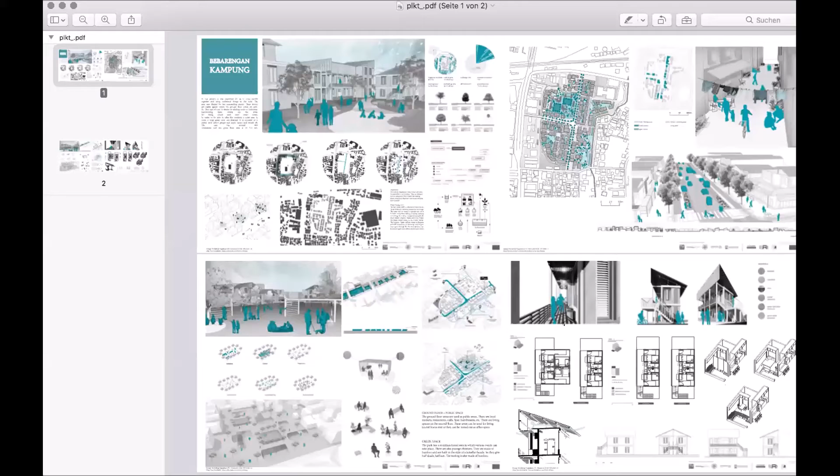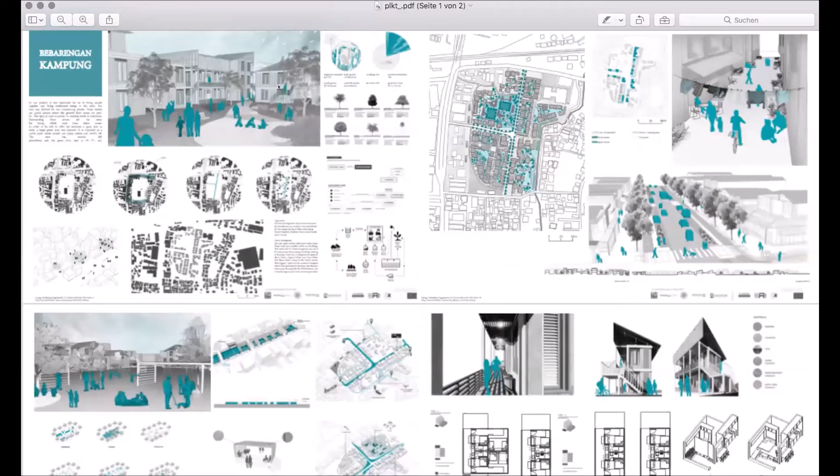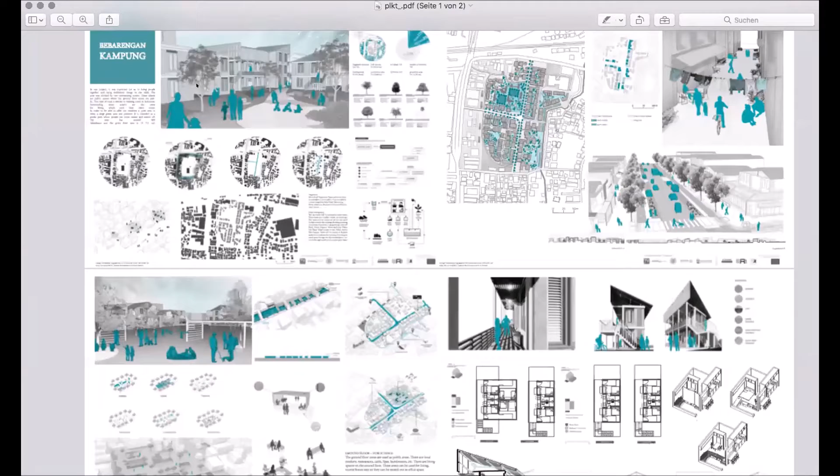Yes, the logos are very small. You have 4 plots in one, that's good. Okay, now I got it, thank you, that's an overview. Yeah, that's the overview, because we thought it's also a good view to see who stands together. Yeah, definitely. So I'll zoom in just a bit.

So this is our project, Bebarengan. I'm not sure if I pronounce it right.

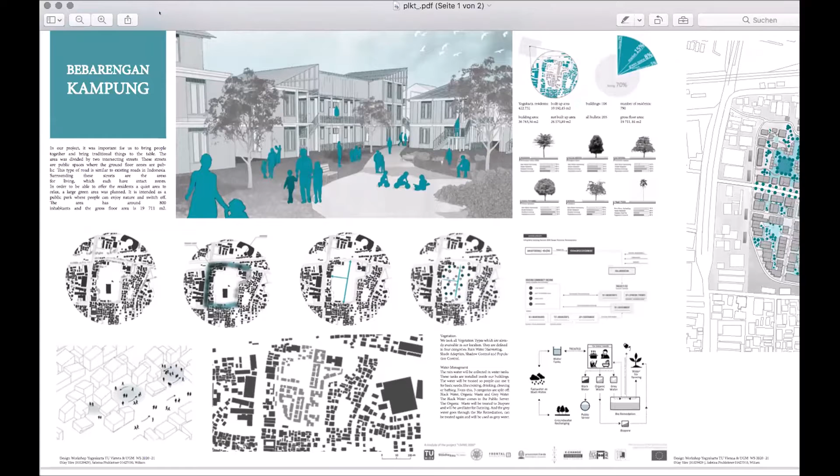If not, please just correct me. You have to ask William. That's true, but he never said it was wrong, so I think it's okay. It's Bebarengan. Oh, thanks, yeah.

So for this project, for us it was really important to make something natural, so passing to the Kampung area, because we started in a very wrong way. I think it was not so much like a Kampung project, and we started to research lots more and understand the people.

How they live and what they need. So we looked at the existing vegetation areas in the Kampung and around our site, and we looked at where it's loud on our site, or where has a lower noise intensity, and how can we build our roads so people can arrive easily to our site and use the roads in the best ways, and how people are going to move on our site, what they actually need to move.

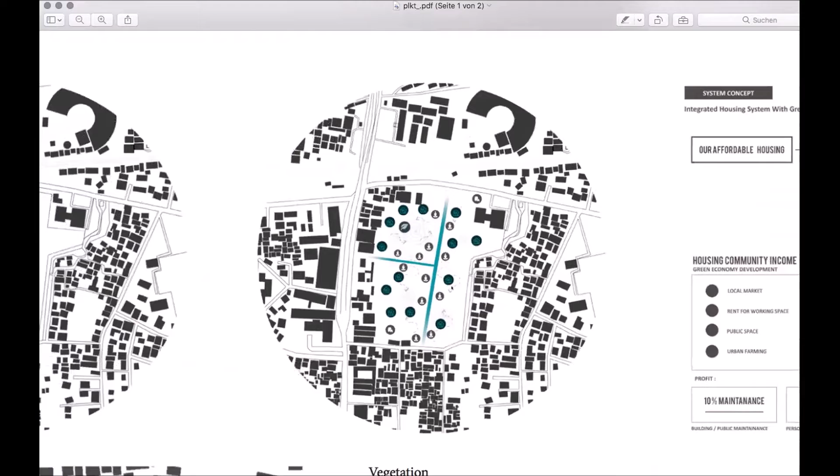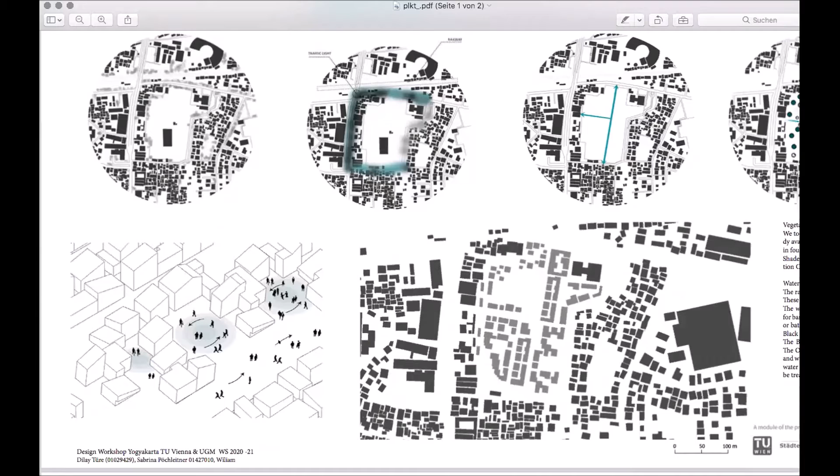So we realized people like to get together very much in Indonesia, in Yogyakarta, or in this Kampung area. So after we decided on our road, we started to build our buildings around the roads, and tried to make as many meeting areas as possible for the people.

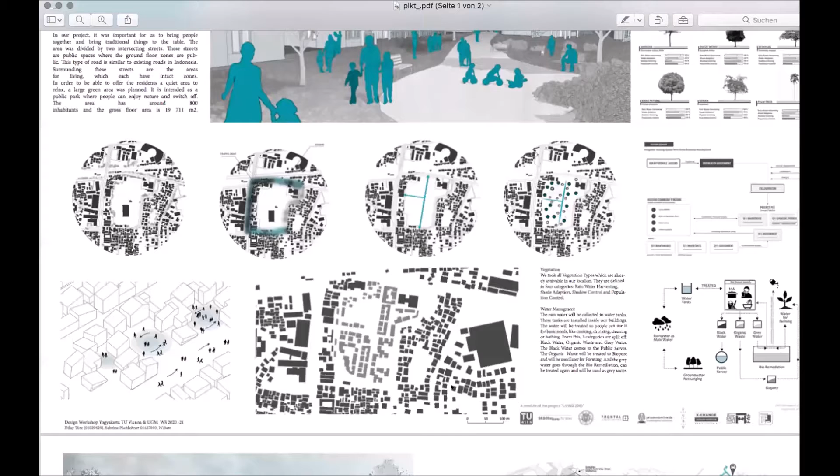And if we see our ground figure plan at the moment, we see the harmony with the site, which is new, with the rest of the Kampung area. And this is how it actually looks.

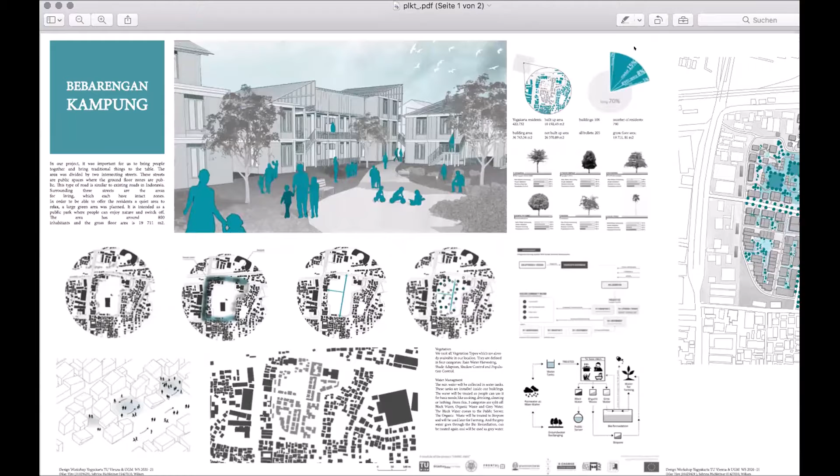And Sabrina is going to add something. So now a little bit about our statistics. We have around 800 residents in our city and around 20,000 square meters gross floor area.

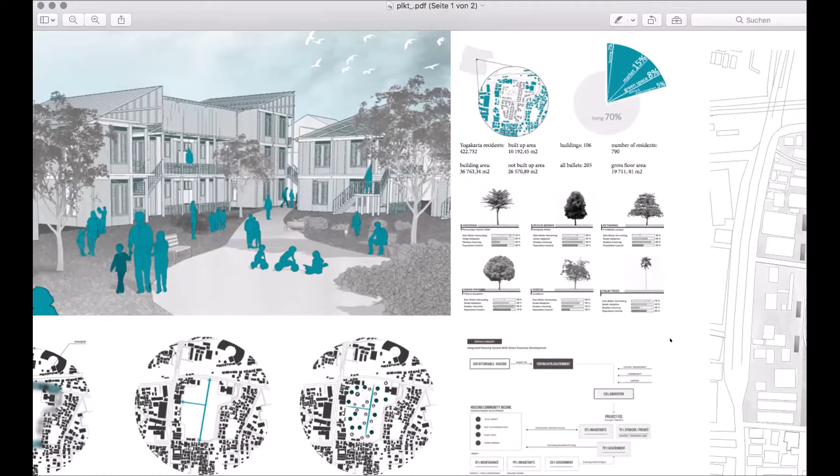Our whole area is like 70% living for the people, 2% from farming, then 15% by the market [shares of total]. Then we have a green space, like a park, where people can relax and calm down, because outside there's a lot of traffic and often it's very loud in this area. And also we have 5% for waste management and for parking, because this is also very important.

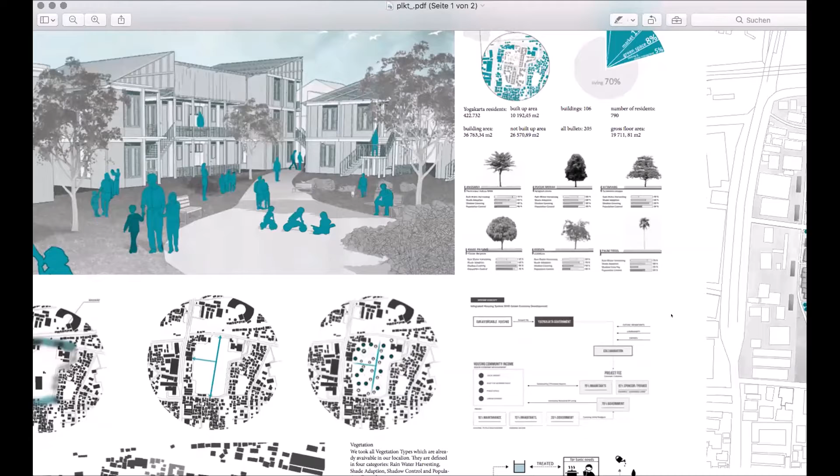So for our green space concept, we took all vegetation types which are already available in our location, so it fits more with the surrounding. And we tried to define them with 4 categories: the first is rainwater harvesting, the second shade adaptation, then shadow control and population control.

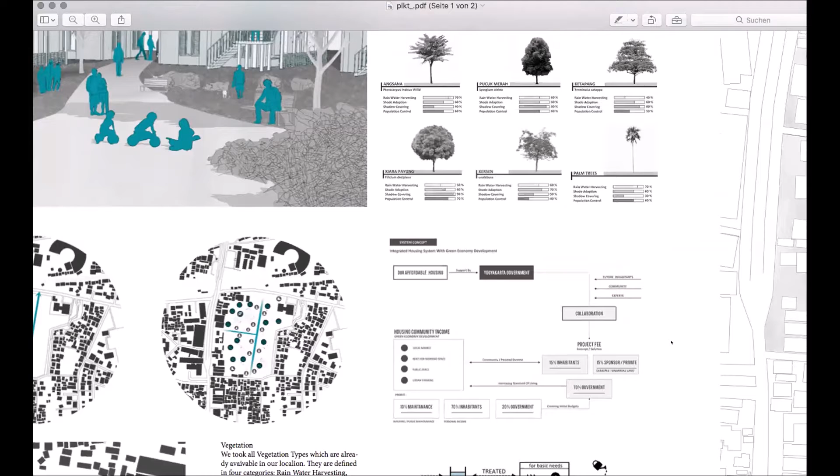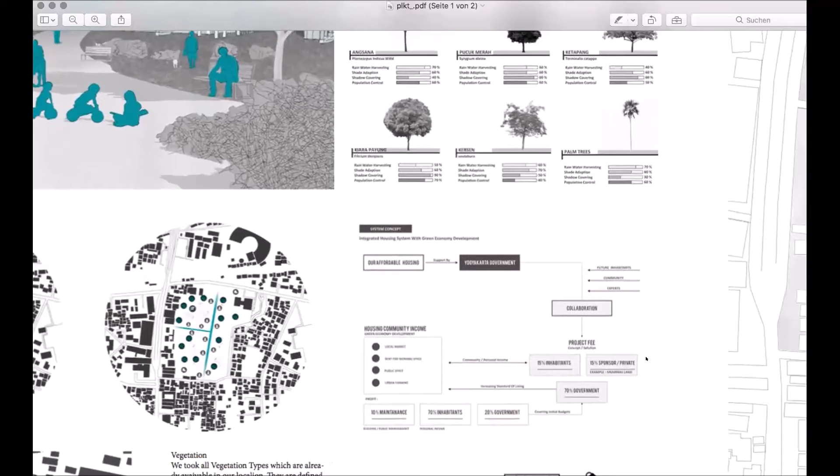Then we also thought about how we can make affordable housing for the people, and we had a few thoughts on it. Firstly, we need support from the Yogyakarta government, and this leads to collaboration. So 15% is from the people who live there, from their income, 15% is by private sponsors, and 70% by the government.

So we thought about how the housing community can make an income. First, we thought about local markets in the area where people who come to our area can buy something, but it's also for the people who live there. Secondly, we thought that people could rent space for working or business, so people who work there will also come into our area. And then public space, meaning restaurants, cafes, spas, barbers, anything like that, and urban farming.

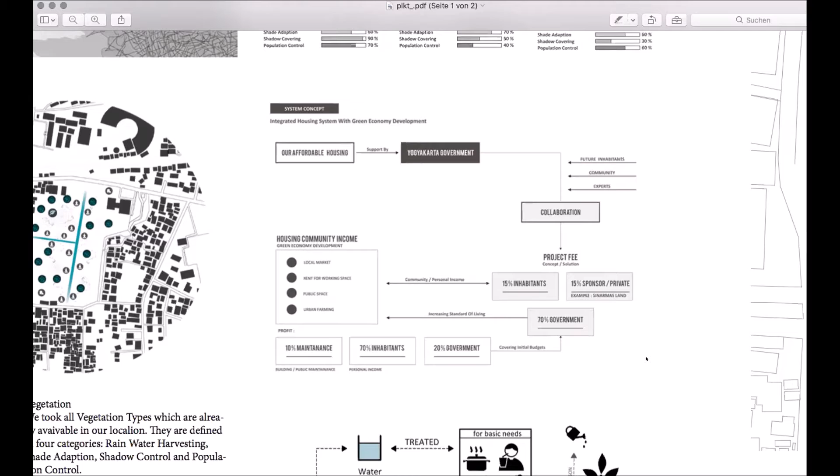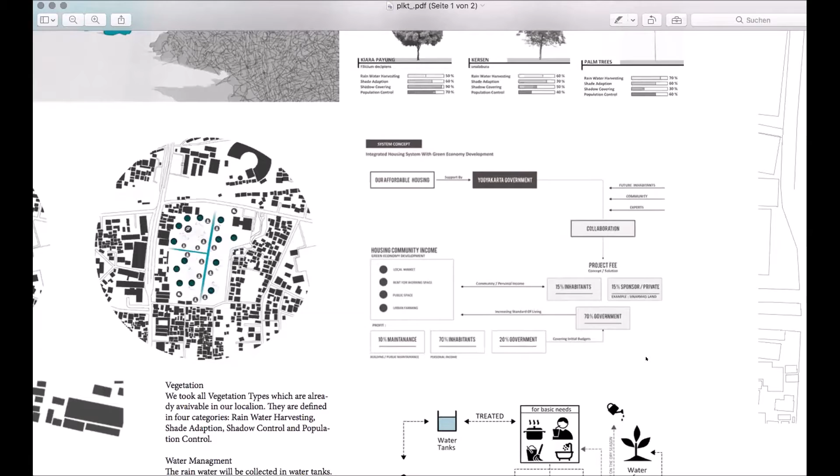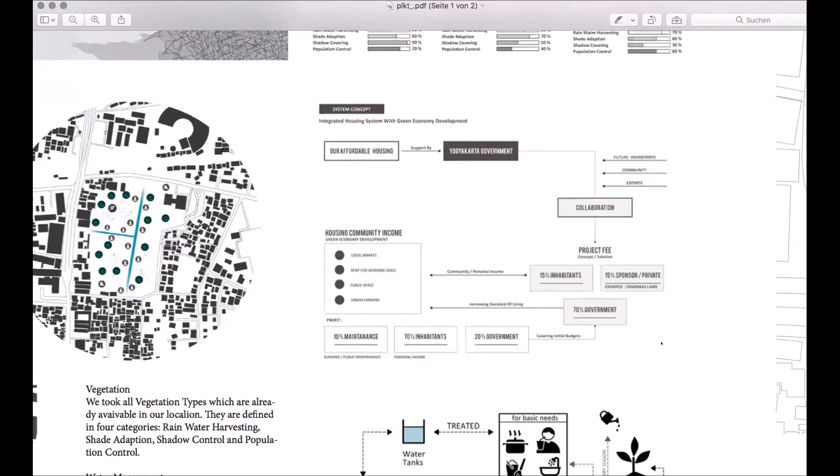So we also thought, what if there is a pandemic like right now, what do we do? If there is a case like that, we think we switch things, meaning we focus only on our local markets and not so much on tourism, because there won't be as much tourism and not many students will come and live in our place. And yes, so now I will go to our water concept.

We start by collecting rainwater in water tanks, and these water tanks are included in our buildings. This water will be treated, and it can be used for basic needs like cooking, drinking, cleaning, or bathing.

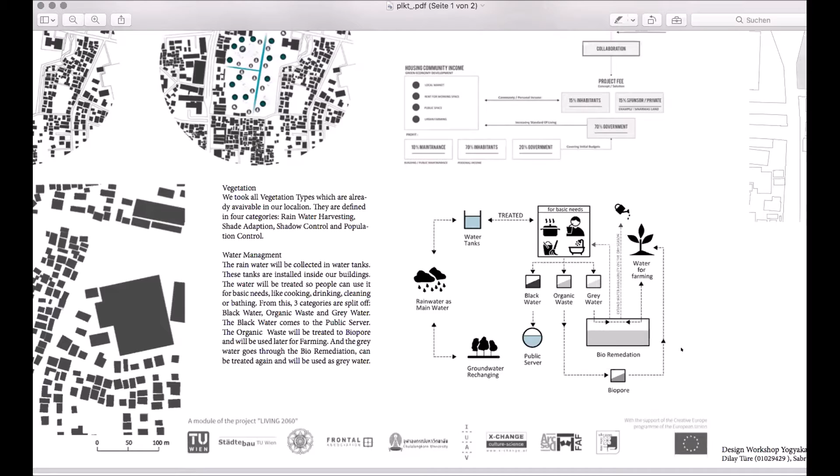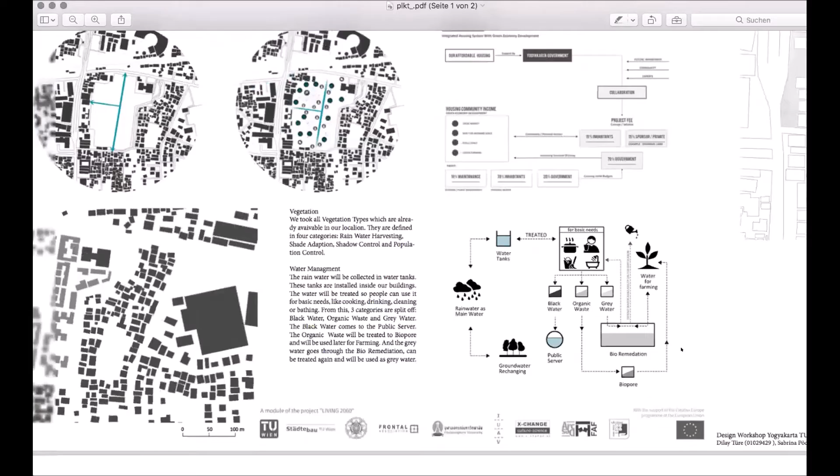From this, three categories split off: black water, organic waste, and gray water. The black water goes to the public sewer, the organic waste is treated in the biopore and used later for farming, and the gray water goes through bioremediation and is also used for farming. It can also be saved for dry seasons and used as gray water again.

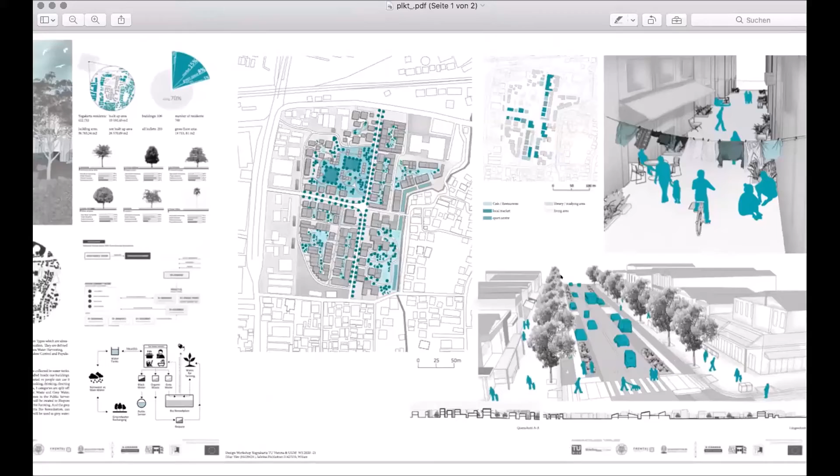Here we see the master plan and some views imagining our streets. How can they look like?

We imagined and offer a big park for people who really like to get together, take space, and make events all together. This park is there for that.

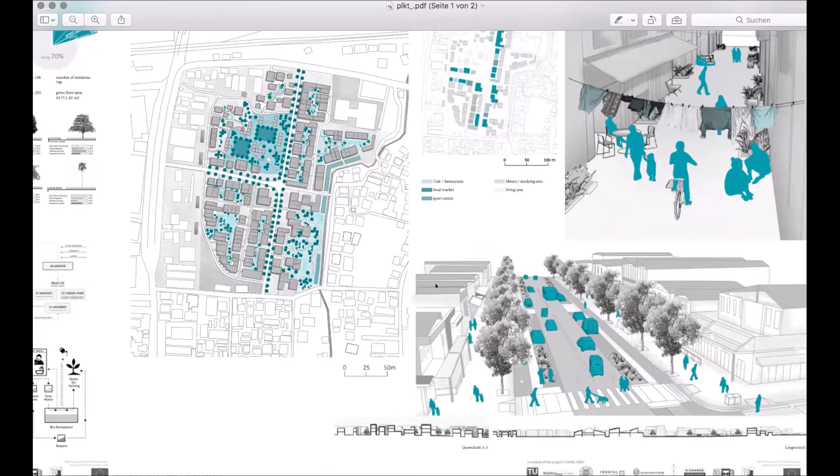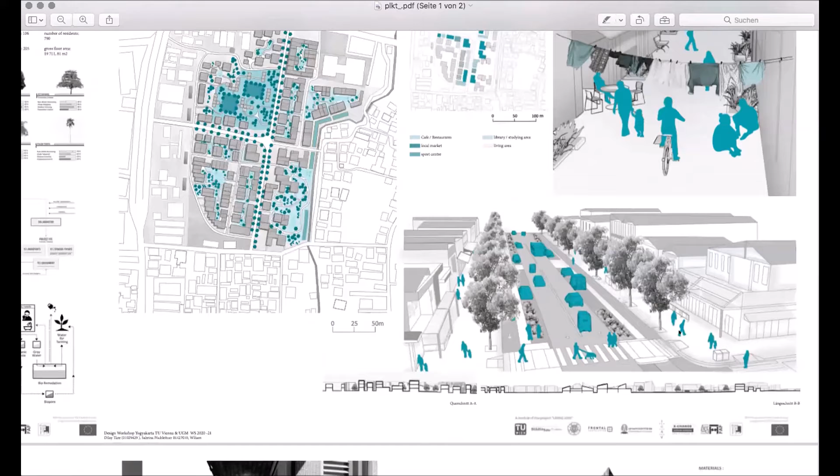This view represents the street, the main street. Our research shows that in Kampung areas, the ground zone is always a commercial zone, and upper floors are for living. So this street is a big street with some greens and trees, where people can buy stuff, with meeting areas representing this.

This picture is from somewhere here, for example, or here. It's a smaller street between the buildings. People can just sit there, because we saw all the time in this area a kind of living area outside. People can just sit, take their tables, and meet there.

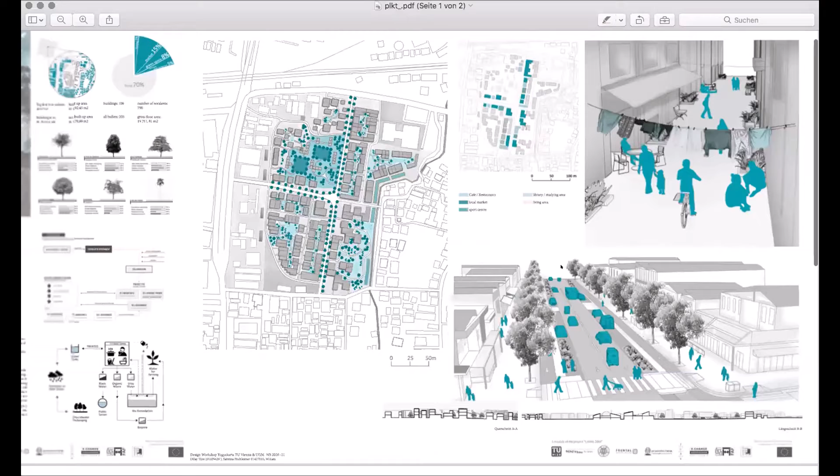Would you like to add something, Sabrina? No, actually, only on the graphic, you can see we pointed out where it should be. Oh yeah, exactly, just for a better explanation.

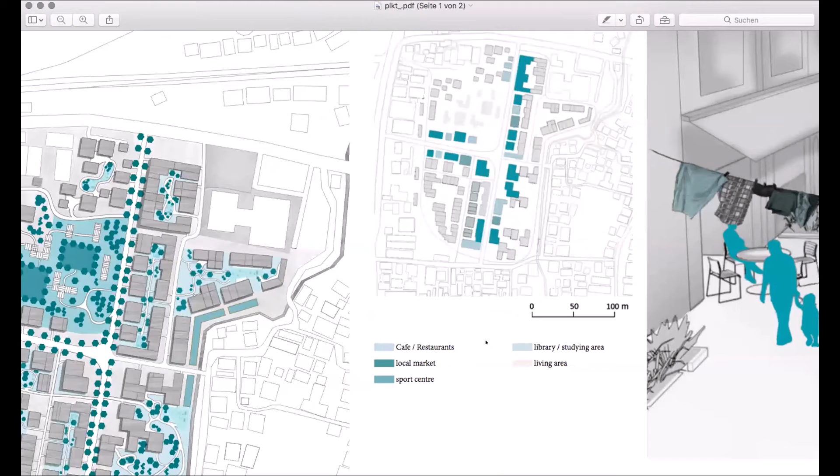So everything which is blue and middle blue, those are the ground floors, and these are public. Let's go to the next page.

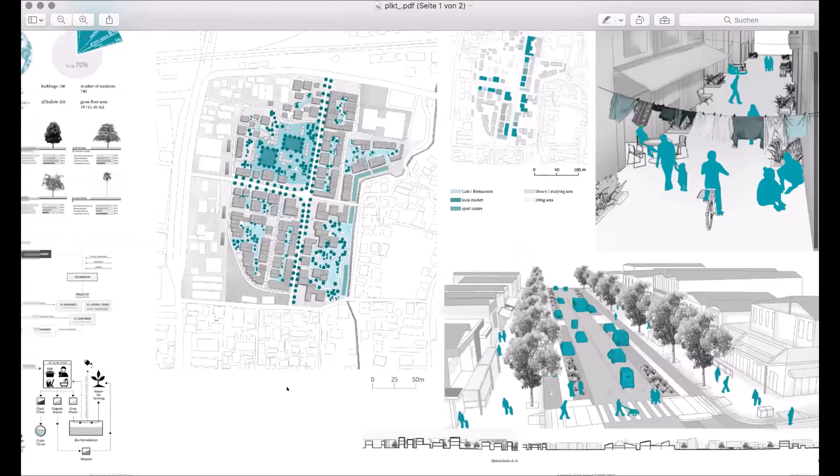And our park design. About the park design, because it's a big space, we made thoughts on how we can design it for people. We thought first that we want a multifunctional space where different events can take place.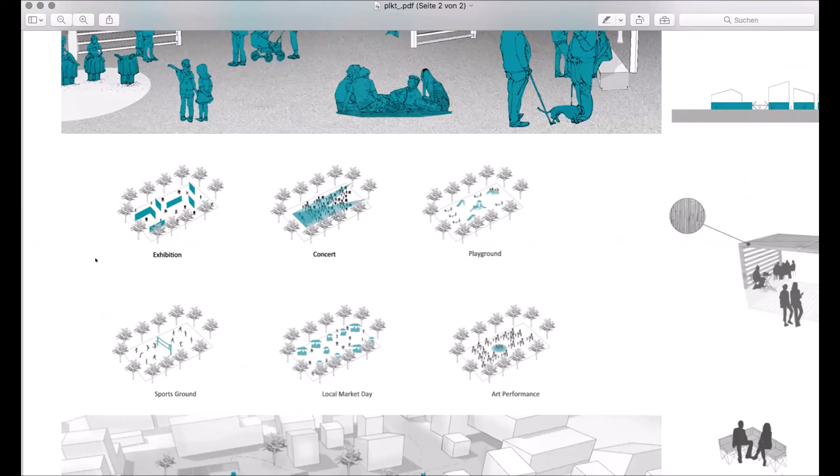Also, on a smaller scale, we thought that traditional parks in Indonesia have a gate as an entrance, and we thought we could make something similar but more abstract.

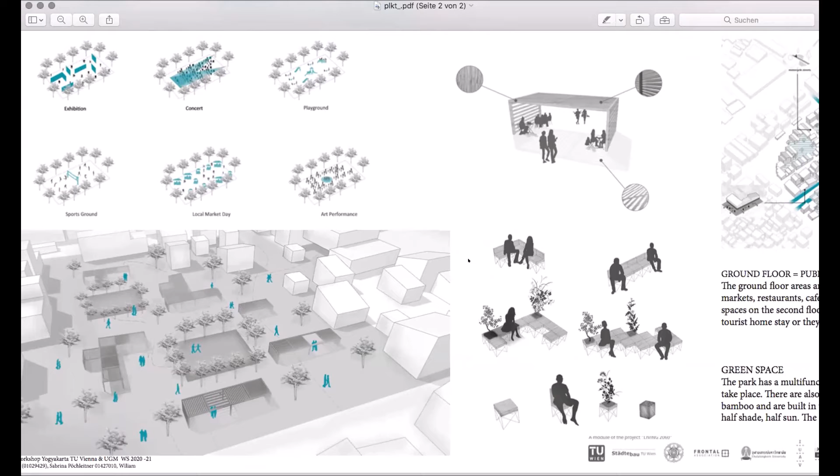So we made this passage where people can sit under it, chill, or just walk through it. The material is bamboo, and the facade is like a lamellen facade, so it's closed but also open, so it's not so hot in this area.

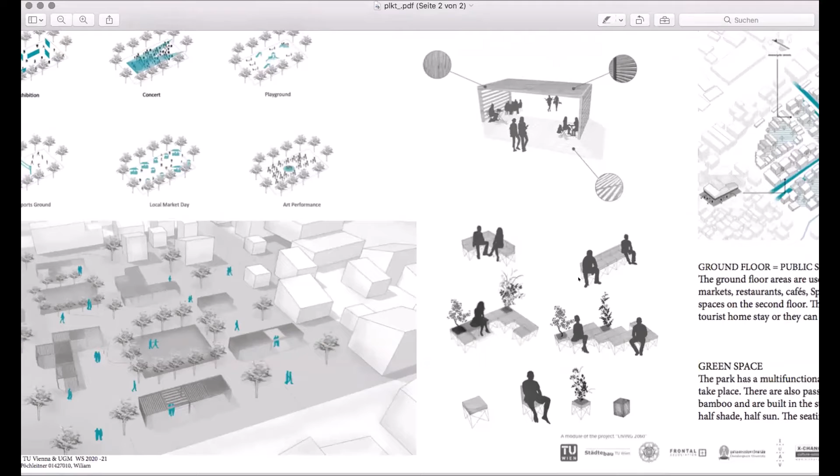Above and under it there are sitting options we thought about, how they can look like. And when you go up again, there's the same concept: on the ground floor there's the public space, and above there's a living area, but it can also be like a tourist homestay or something like this.

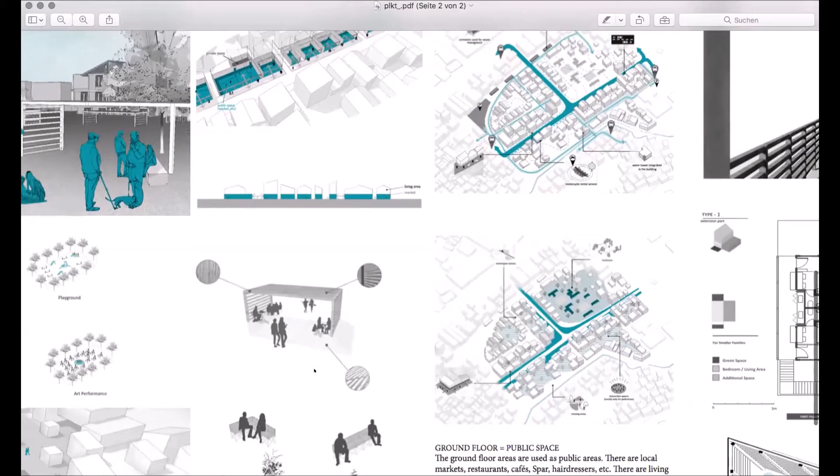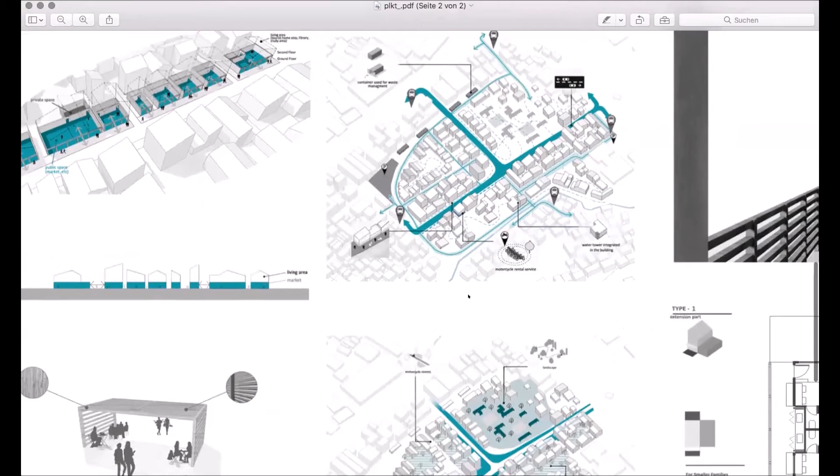This diagram shows the main street and streets for cars, pedestrians, and motorcycles, with some bus stations around the site. We just thought about it, but it's possible. Of course it's a question, but it seems like it's possible.

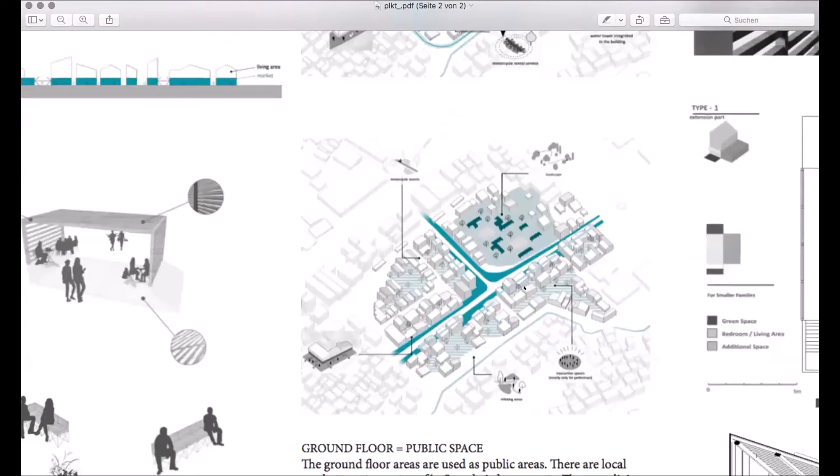And it shows meeting areas between the buildings. I think you're okay with the park explanation. One thing about it: the big line is only for cars, and the smaller line is for motorcycles, so we don't have so much traffic in our area.

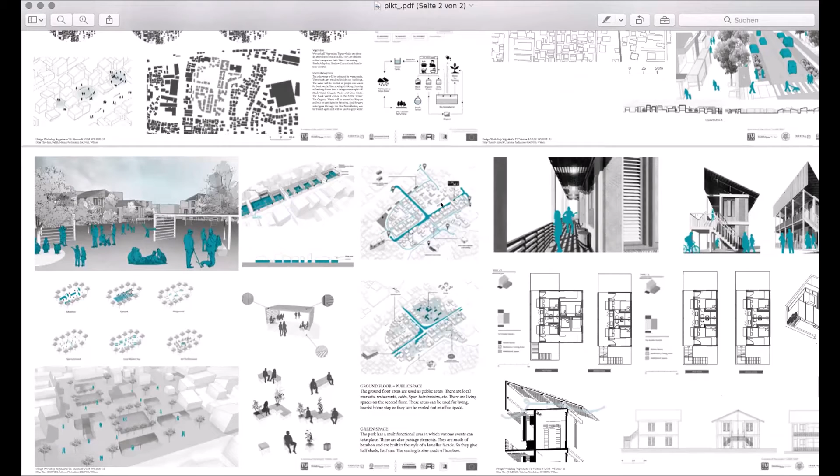So this is our building concept. We tried to design a building not so different from the Kampung itself, so we see open terraces, common kitchens that people use together, open entrances, and lots of space to use together.

If I just explain a bit the floor plans, this is the smallest version of our floor plans. Here we see two small flats, and they share the kitchen.

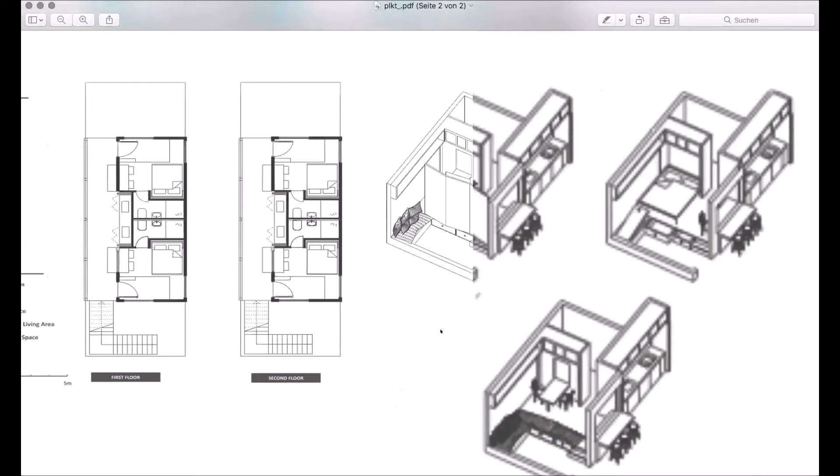If I show the 3D version, it's more understandable. This is the shared kitchen. It has foldable doors that can be folded and closed, and we have a big window connecting the outside and the inside.

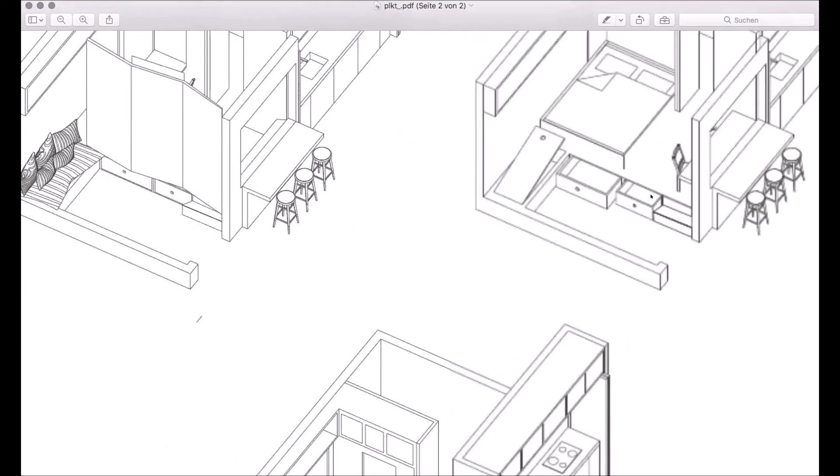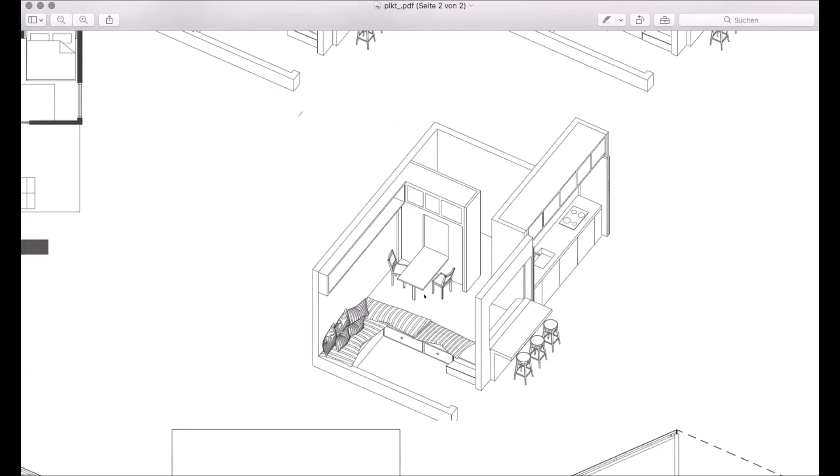So people can cook and bring the food inside, or pass and share the food with others. We offer lots of storage areas, about 40 centimeters high, with stairs so it's not hard to get up and down. Because the flat is very small, they can really use these storage places. This bed is foldable. When folded, they can use the space as a sitting area and enjoy an evening with this table, which is also foldable. So it's a small area, but has many functions.

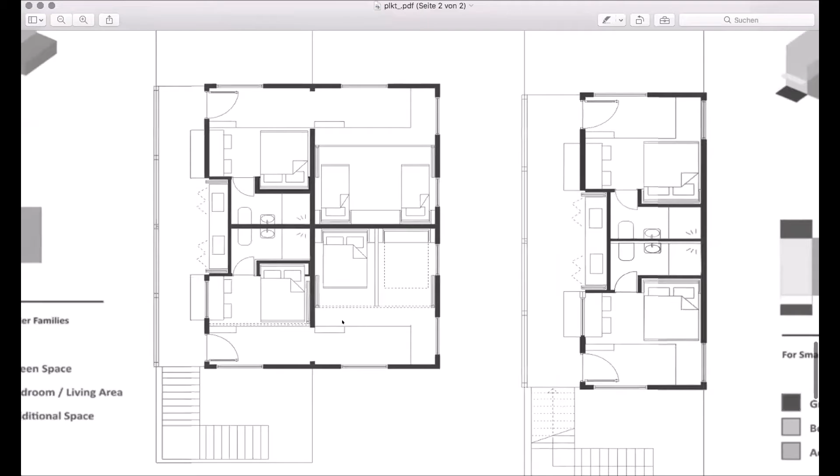It can also be bigger because our building system allows people to build extra external parts if they need. You see here the house type - this part is the essential part, like I showed, the smallest part. They can build this part as an extension, and they can have double rooms with double beds or small beds.

They're also foldable. This is a section of the building, so we see a roof system here. It's a very light roof, just for rain protection - it covers the rain but lets the air flow through. It's open and designed for tropical areas, a very usable roof, I would say.

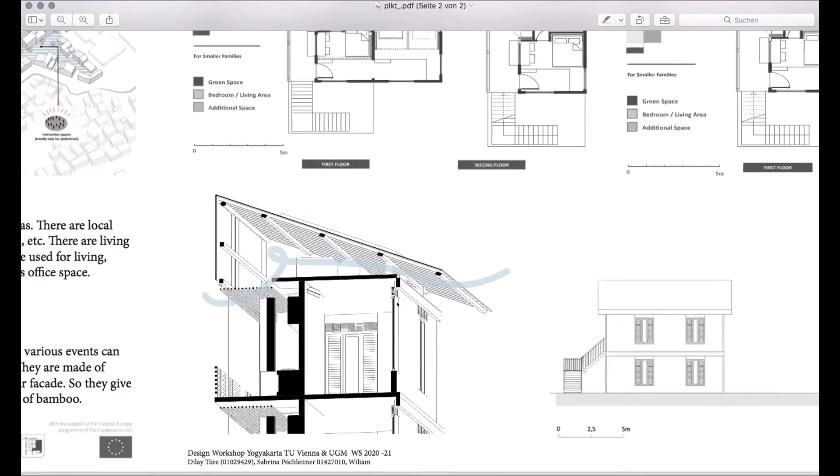We thought this angle of roof is very suitable for a solar system and solar panels. Also, under the roof there's enough space for storage, for batteries or a water tank, for example.

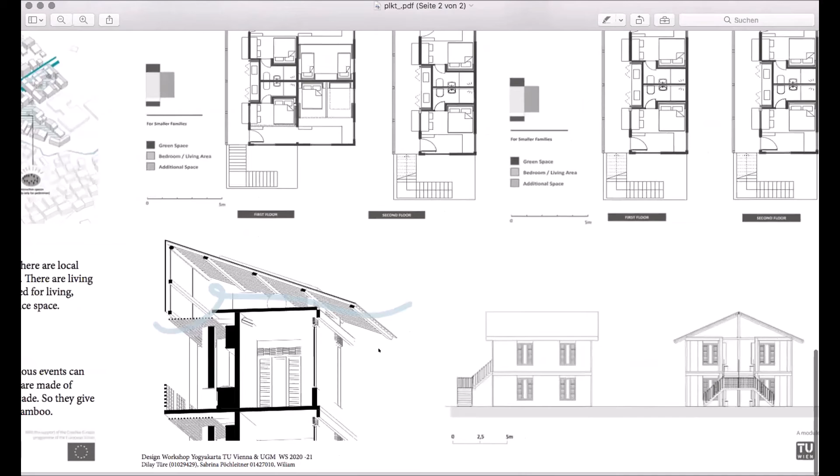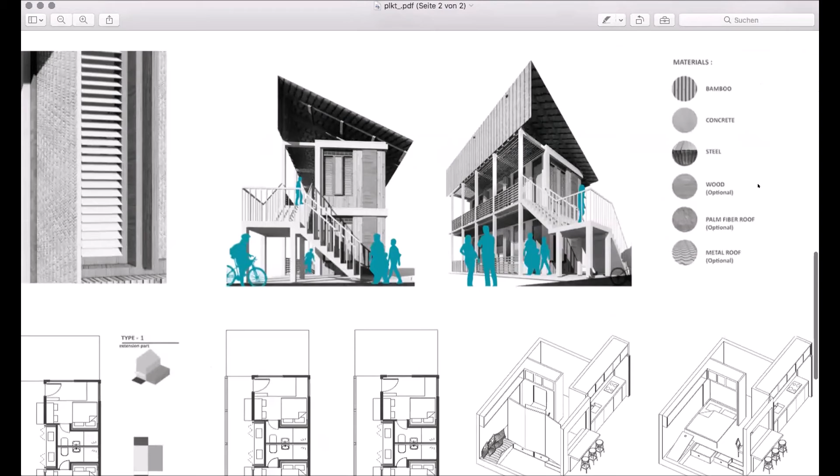Regarding materials, most likely in that area people use bamboo and concrete because it's cheap, steel, wood optional - it's apparently very expensive. Palm fiber for the roof, and a metal roof, though we don't want to use it, but it's optional.

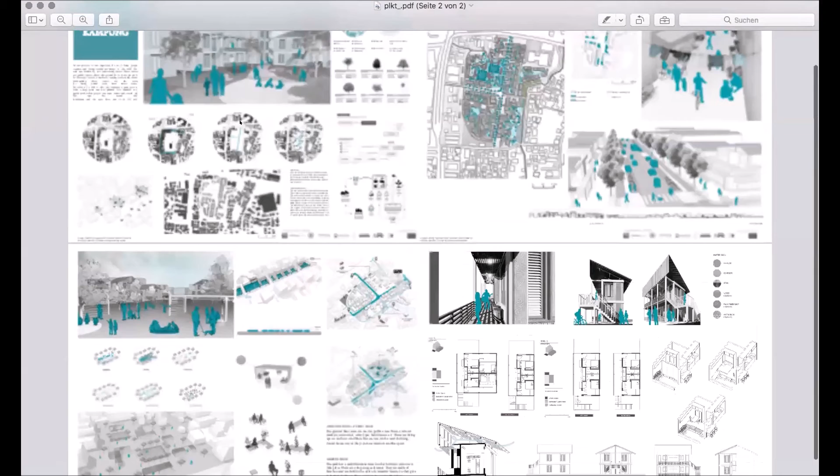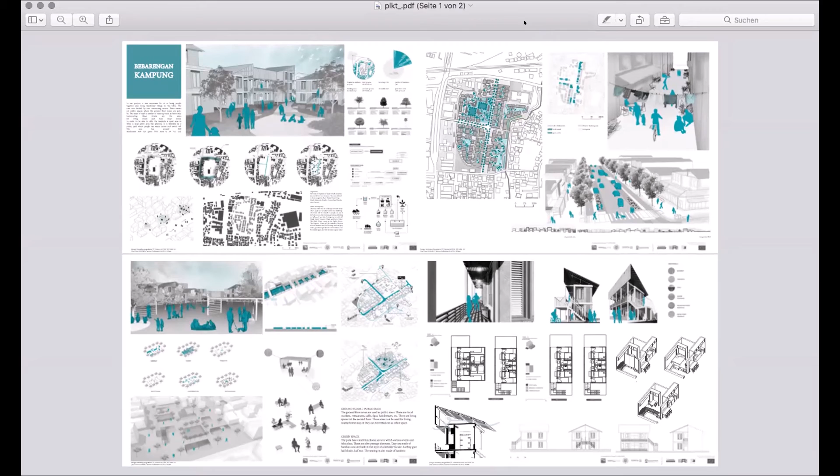About the design, I think it's very nice - the design accommodates all of the activities that people usually do in a kampung. They also provide many multifunction open spaces which can be used by kids or adults, and can provide houses for tourists and so on. I think it's interesting that they accommodate all the activities in a good, detailed design. Even though some drawings probably still need revision, they accommodate all of that in the detailed design. I think that's good, it's very nice.